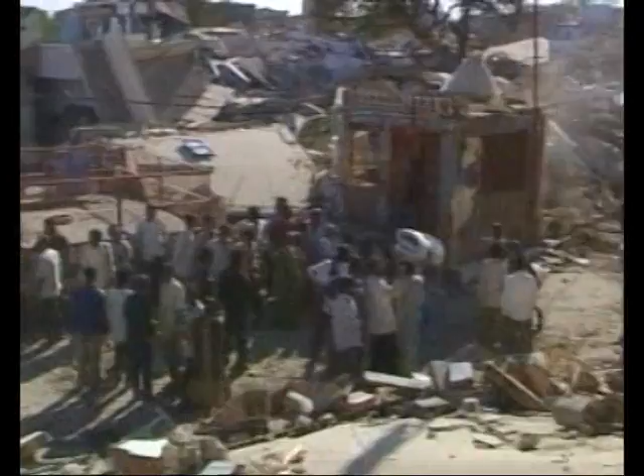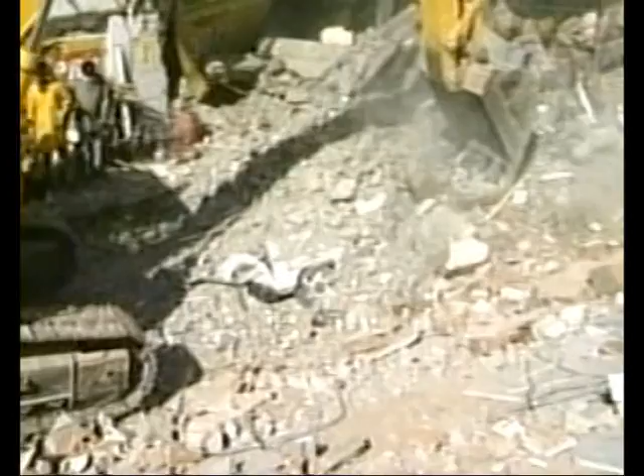This could be you or me, as in the last 5 major earthquakes, over 2 lakh Indians died without even knowing what wrong they did. Thankfully, we survived. And we should stop and think what we can do to protect ourselves and generations to come from the wrath of earthquakes.

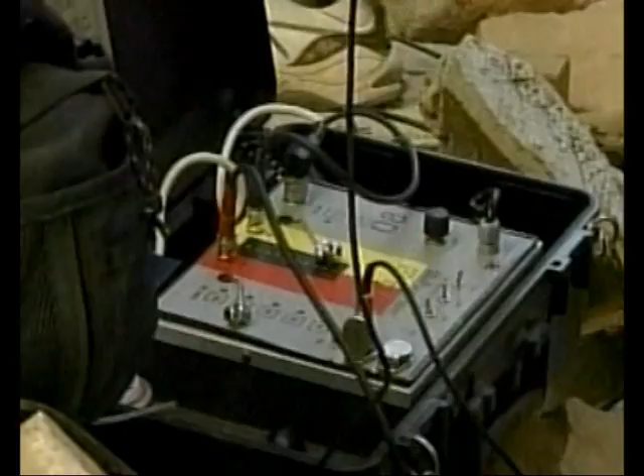We construct houses and other buildings to live, work, and to protect ourselves against the natural calamities. But do we truly bother to ensure a long-lasting and safe building?

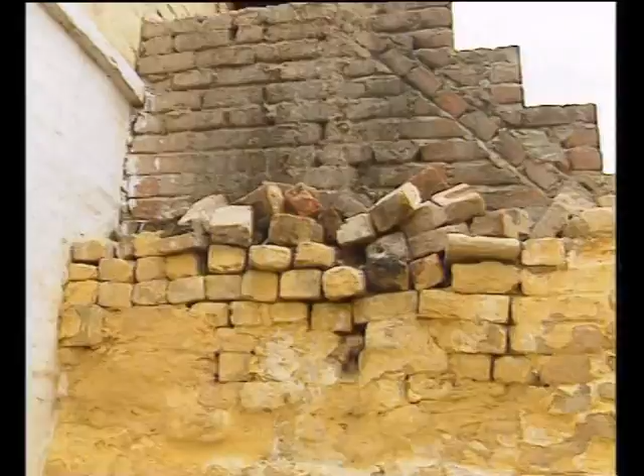Many of those who died could have been with us if they knew how structural engineers and architects use some of the fundamental principles of physics and mathematics to create buildings which can absorb, disperse, and withstand strong seismic forces. Those of us who had incorporated these features in their building structure survived with least to nil damage. As the structural scientists say, earthquakes don't kill, unsafe buildings do.

In India, over 85% of the population lives in masonry buildings. The Disaster Management Division of Ministry of Home Affairs, Government of India, referred a project related to the testing of masonry buildings to the Department of Earthquake Engineering, Indian Institute of Technology, Roorkee.

The idea is to formulate and effectively demonstrate the efficacy of seismic strengthening of the popular 3 types of masonry buildings: brick, block, and stone masonry. The experiments are to be conducted on the railway wagon shock table testing facility available at the department.

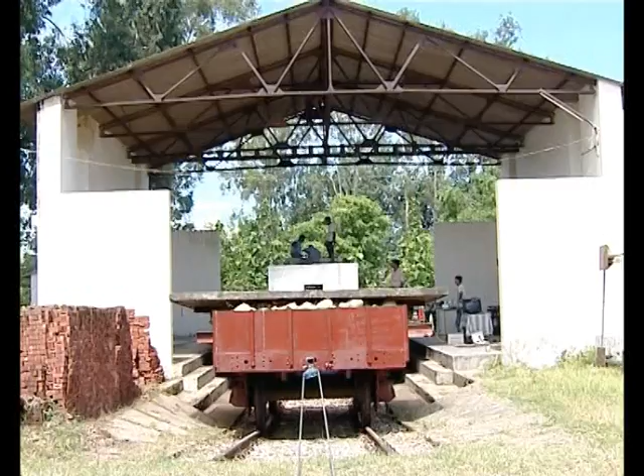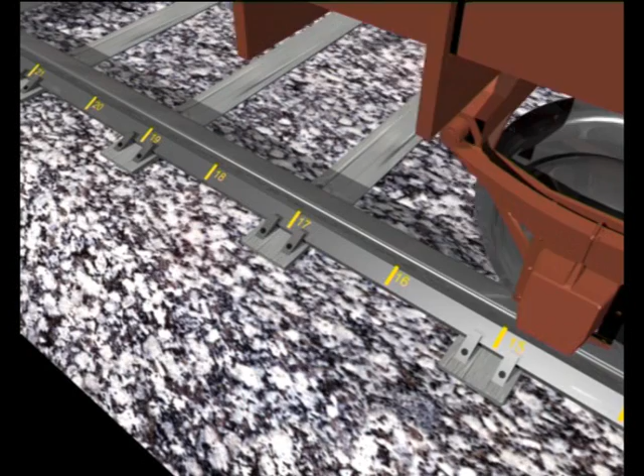The shock table comprises of a 36-meter long railway track having mild gradient on either side. The rails are marked at half-meter intervals as a guide for positioning the wagons before releasing to achieve the desired impact. Shock table forms a rigid steel platform which is used as the base for dynamic testing of building masonry models. 10 helical steel springs have been mounted on both ends of the table to convert the impact into earthquake-like wave.

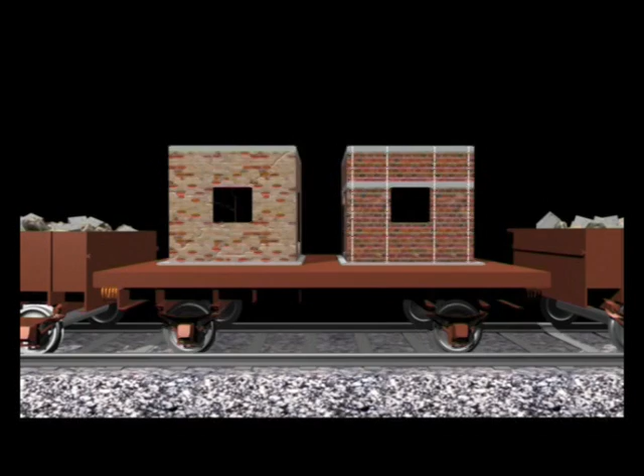Loaded wagons are placed on the track inclines on both sides of the shock table. The weight of each wagon is adjustable. The wagon on the left side is allowed to roll down the incline to collide with the shock table platform. Due to the impact, the shock table wagon starts to move and collide with the other stationary wagon on the right side and receives impact in the reverse direction.

In this way, the model constructed on the shock table receives 2 shocks simulating earthquake-like motion. The intensity of the shock is controlled by positioning the loaded wagon at different distances on the track incline before release for rolling down.

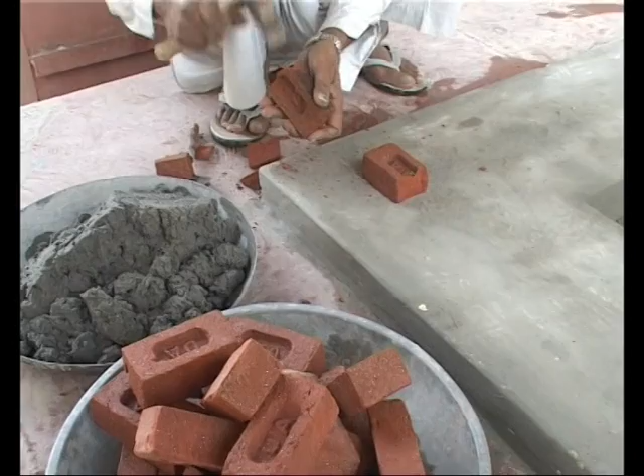2 half-scale, single-room brick masonry models are constructed simultaneously on the shock table. The first model is constructed using popular construction techniques as we have been doing for years. This model has been constructed without any earthquake-resistant features.

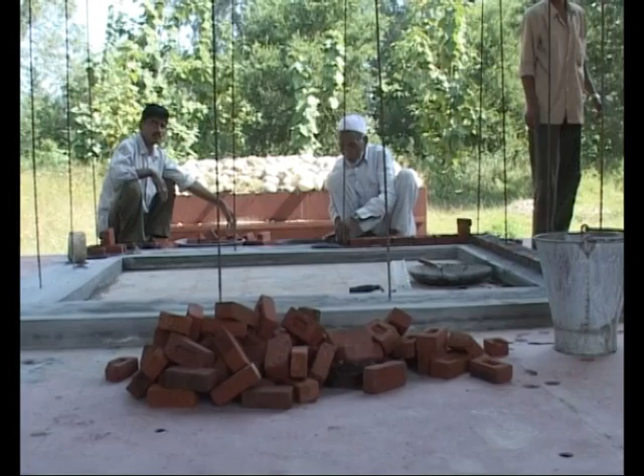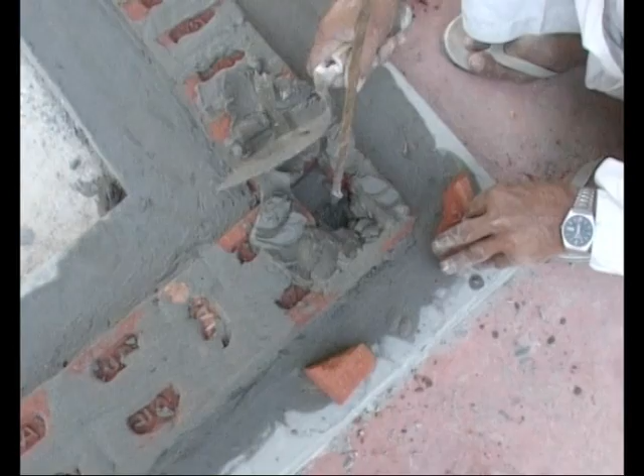In the second model, all seismic strengthening arrangements specified in earthquake safety codes like vertical reinforcing bars at the corners, jamb steel around the openings, and seismic band at lintel level are incorporated. As per chosen scale, half-size bricks are laid in 1:6 cement sand mortar, providing space for the vertical steel bars at the corners and near the openings.

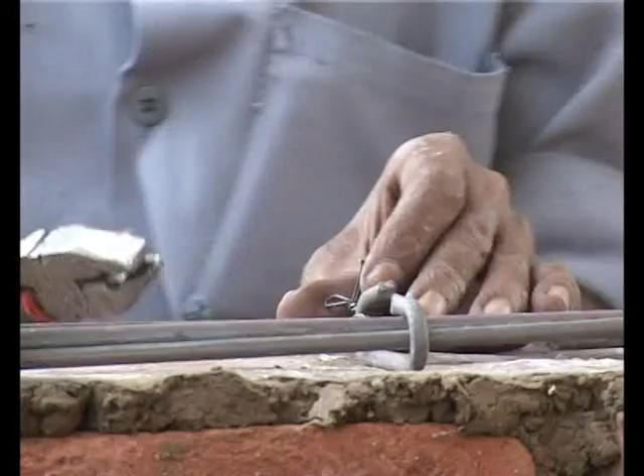The gap around the vertical bars is filled in 1:2:4 concrete mix with 6 mm size aggregates after every 5 courses of the wall construction so as to develop full bonding. The walls are completed up to the lintel level and a monolithic horizontal seismic band is provided on all 4 walls so as to integrate the perpendicular walls.

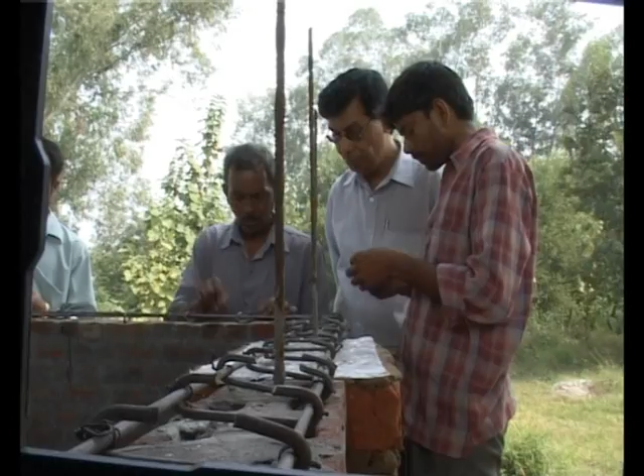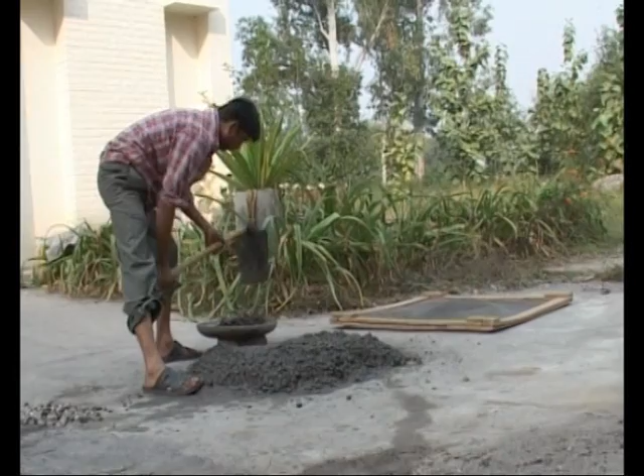In the actual construction, vertical reinforcement is embedded in the plinth masonry into the foundation and is passed through the lintel band and anchored into the roof slab to develop its tensile strength. The reinforced concrete band has the same width as the thickness of wall. The vertical thickness is kept to the half scale. Then the wall is completed up to the roof level and the roof slab is laid as was done for the traditional model.

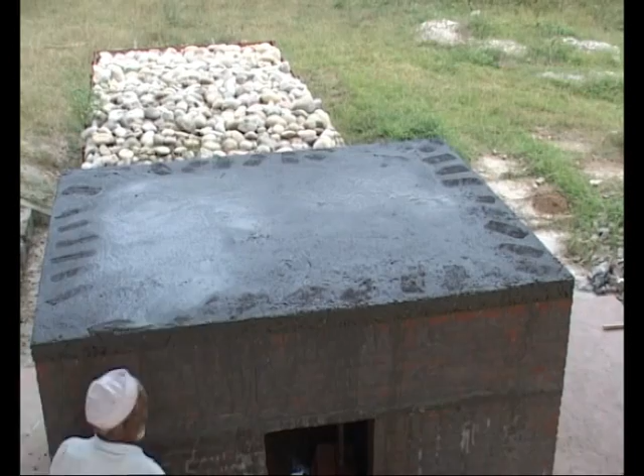The two models look exactly the same. The traditional model is constructed using conventional techniques, while the earthquake-resistant model incorporates corner vertical steel bars, jamb steel bars around the openings, and horizontal seismic band on all the 4 walls at the lintel level. Which will be safe if an earthquake occurs? We shall see by impacting the shock table.

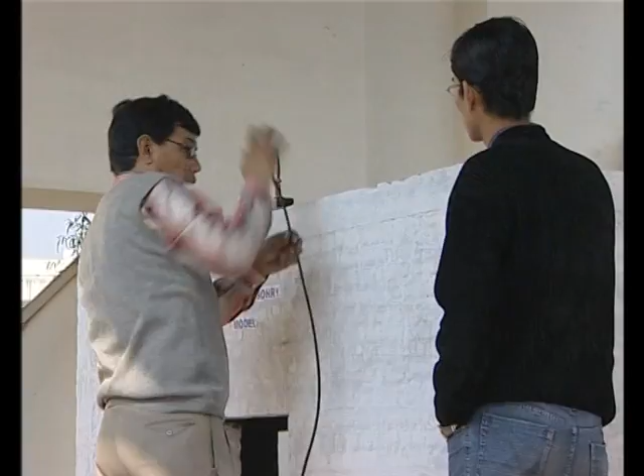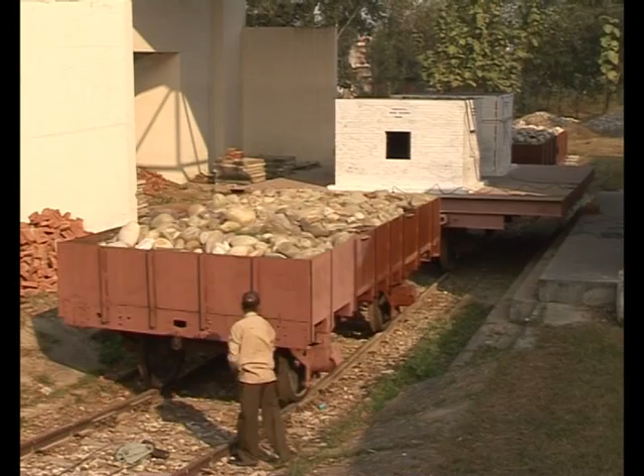Before testing, the table and models are instrumented using accelerometers to measure the intensity of the simulated earthquake and the effect on the models. In the first shock, the loading wagon hits the shock table from the left side, simulating a low intensity shaking. With each subsequent shock, there is a gradual increase in the intensity of the shocks.

So, what do we see? Even after the 4th shock simulating an earthquake of severe intensity, no damage is seen in the masonry model with earthquake-resistant features. But the conventional model is badly damaged.

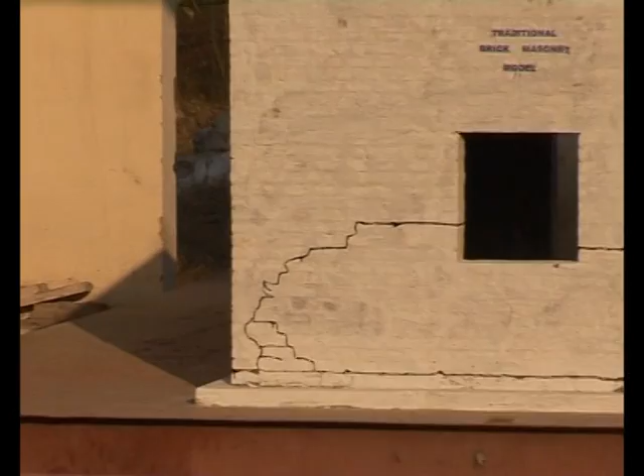The 5th shock is made even stronger. The model with earthquake-resisting elements still remains undamaged.

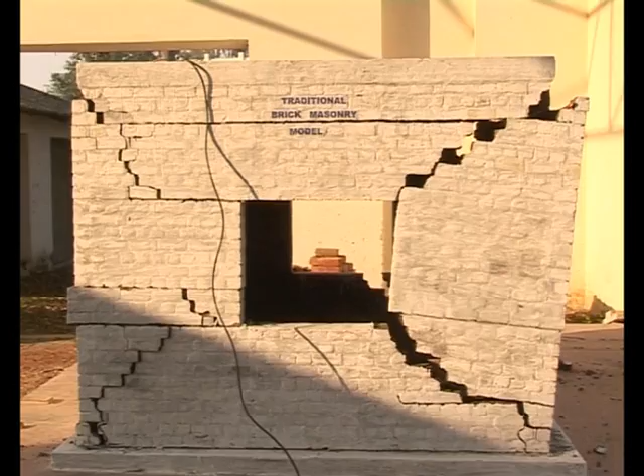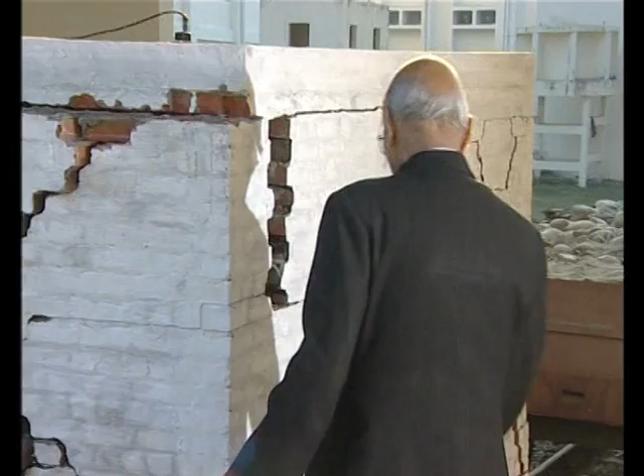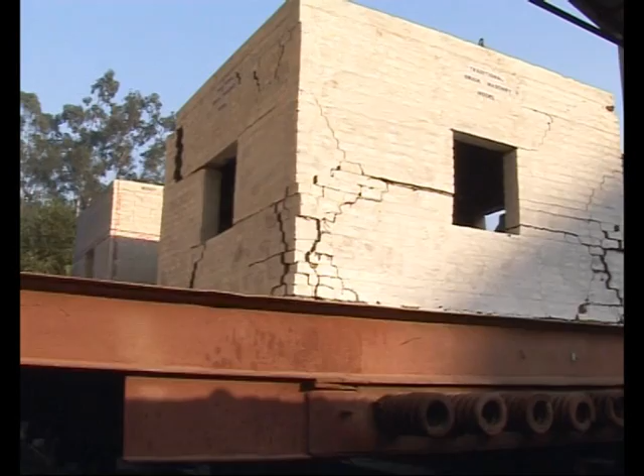So, we see here that this unreinforced model constructed in the traditional manner is failing. On the other hand, this is a model of the same type with the same geometrical details, same dimensions, same wall thickness, same roof thickness. So, everything, mortar etc., everything is the same, but the difference is now it has vertical reinforcing bars at the corners, all the 4 corners.

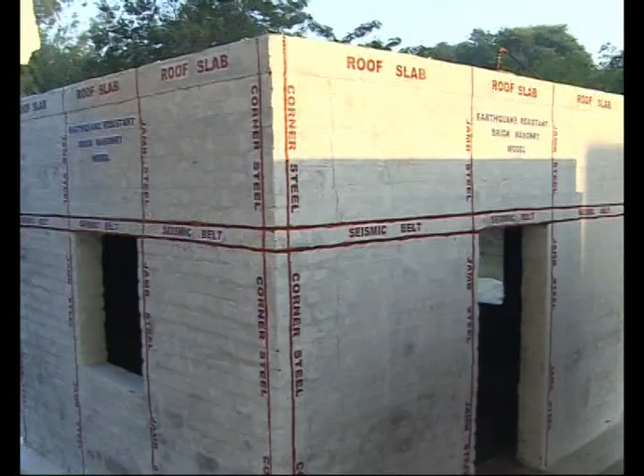It has also vertical bars at the jambs of openings, as we can see here, window jambs and the door jambs, and also it has a seismic belt or band actually, which is going inside all round the building. Now, these reinforcing details are keeping the whole building intact and in very much integrated behavior of all the walls put together. So, you can see the difference.

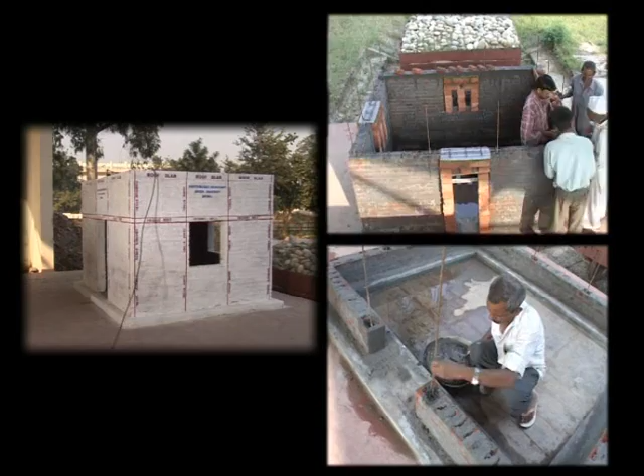Earthquake strengthening of buildings could have saved thousands of lives in Bhuj, Latur and Kashmir earthquakes. At places where it is difficult to get bricks, people use concrete blocks for constructing buildings. Therefore, the second set of tests is conducted using concrete block masonry construction.

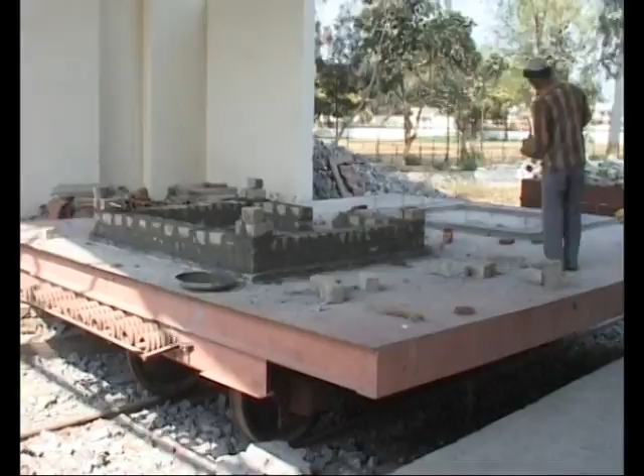Solid concrete blocks of half size have been used to construct two half-scale similar models on the shock table. Both the models are constructed in the same way as the brick models were constructed. For construction of the wall with corner steel and jamb steel near the door and window openings in the earthquake-resistant model, special blocks with semicircular holes are used.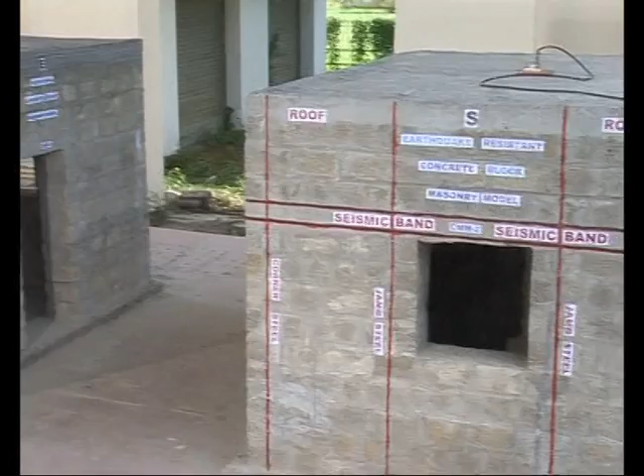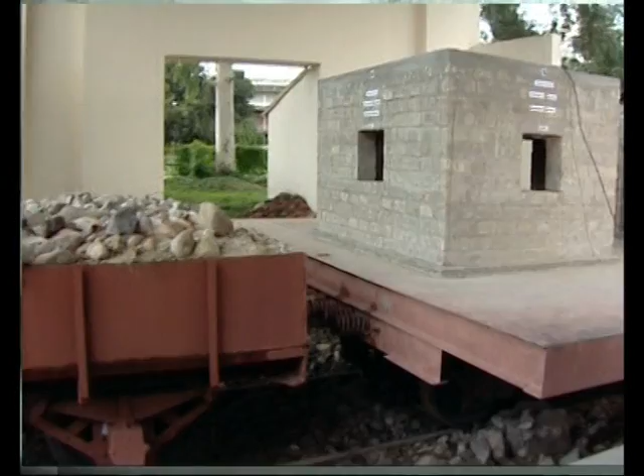The two models differ from each other as the strengthened model additionally has corner vertical steel bars, jamb vertical steel bars around the openings, and horizontal seismic band on all the four walls at the lintel level. During the testing of the models, shock table is imparted shocks of gradually increasing intensity.

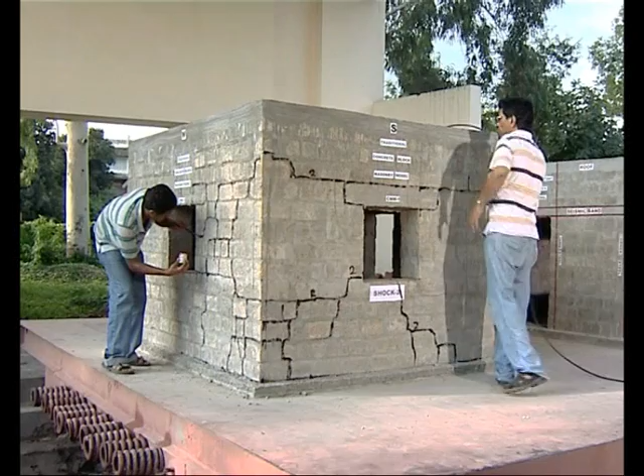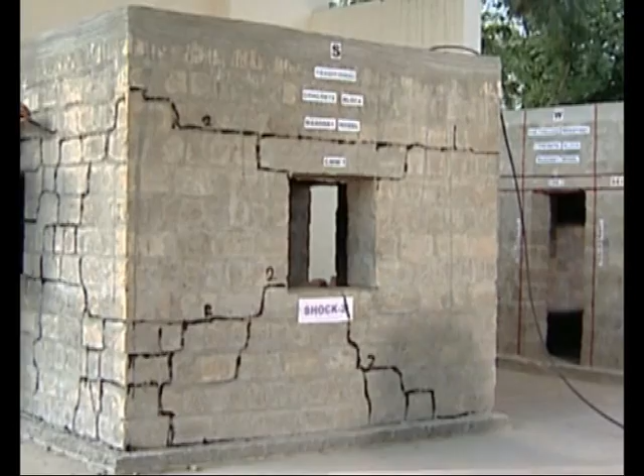In the shock equivalent to a moderate intensity quake, cracks started to form diagonally at the corners of the window openings in the traditional model and gradually spreading towards the corner of the wall. Horizontal cracks are also visible just above the lintel beam, extending to the end of the wall and reaching up to the corners. There is a slipping of the wall from the foundation. These are typical shear cracks observed in masonry buildings after a moderate size earthquake has struck the region. However, the earthquake resistant model remains undamaged even after this shock.

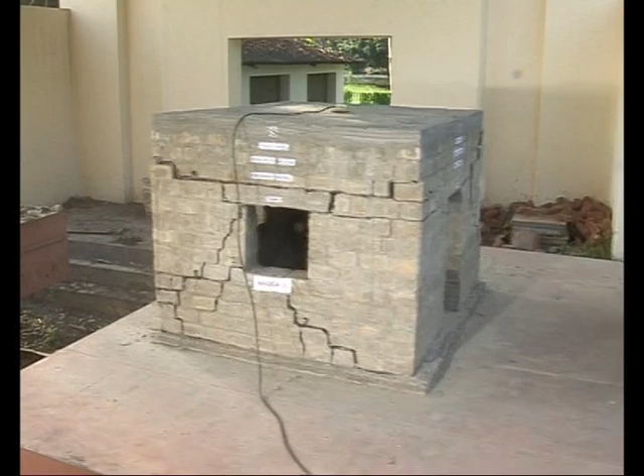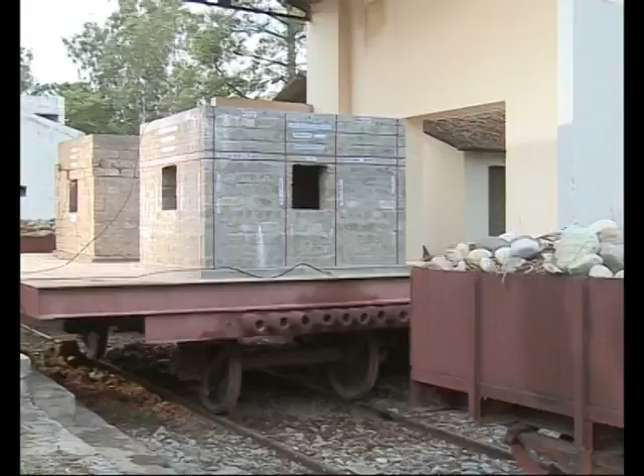For the next shock, the loading wagon is placed further up on the incline to simulate an earthquake of severe intensity, which could occur in higher earthquake zones 4 or 5 in the orange or red areas as per the seismic zoning map of India. The traditional model further loses its strength and stiffness. The next shock is of slightly higher intensity as compared to the previous shock.

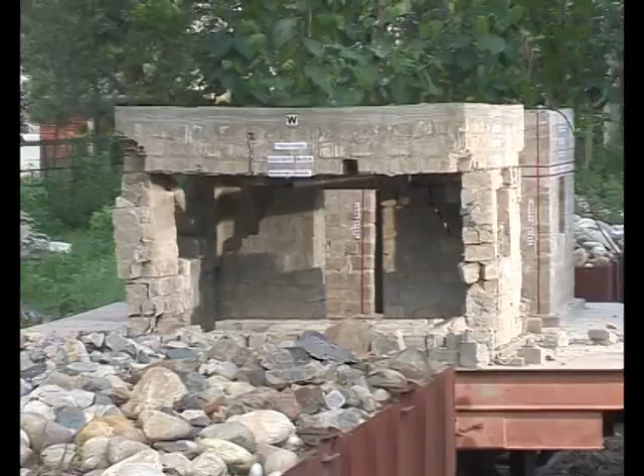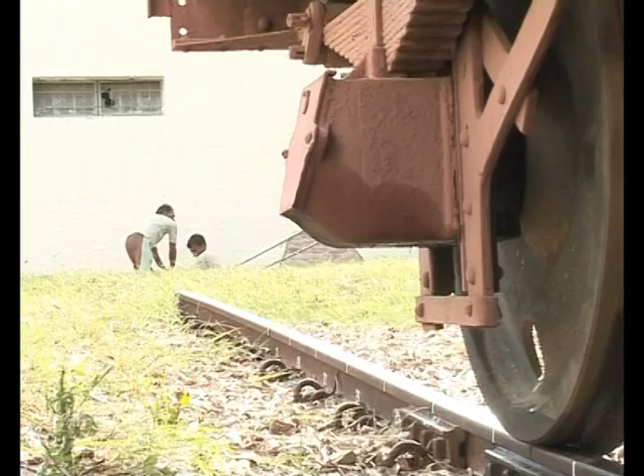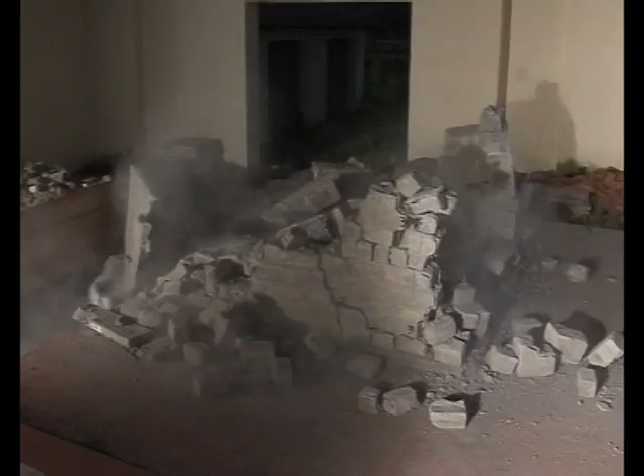Here too, the earthquake-resistant concrete block masonry model shows no sign of distress. There is no damage and the model is intact even after imparting a severe intensity shock to it. In the next and final shock, the intensity of shock loading is further increased so as to check on the strength of the earthquake-resistant model under a much more intense shock. The performance of the earthquake-resistant concrete block masonry model is indeed being put to the ultimate test under this shock loading.

Traditional model could not withstand the severe intensity shock. However, there are no cracks in the earthquake-resistant model. The earthquake-resistant features have improved the building under earthquake shaking.

India is a collage with myriad cultural and religious colors. The diversity in India is even spread across its geographical terrain. As a result, at different places, people construct buildings using different materials available locally. Like in the hilly areas, one would see that a majority of buildings are made using stone masonry construction.

The loss of lives in earthquakes of Uttarkashi, Chamoli and Bhuj underscored the necessity of earthquake strengthening of the stone masonry buildings. Half-scale single-room models are constructed on the shock table. As before, the first model is constructed using traditional construction techniques used by common man.

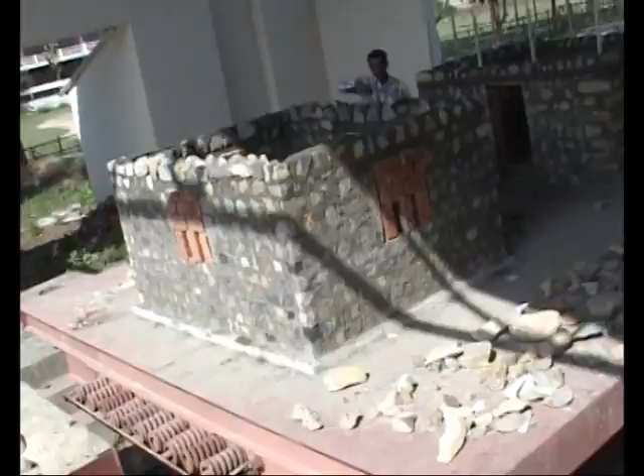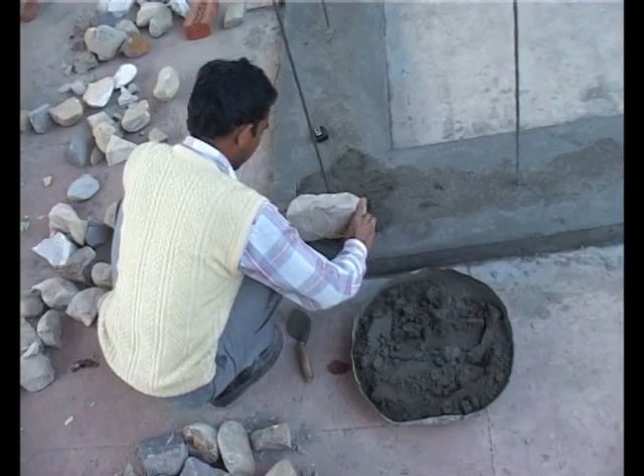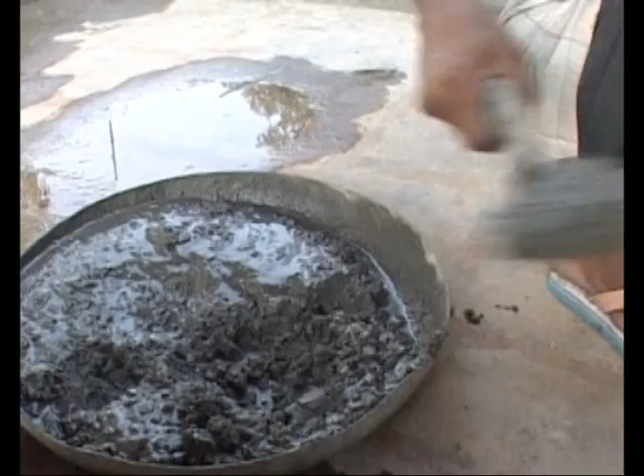While constructing the earthquake-resistant model, features like the corner steel and the jamb steel around the openings are placed so as to develop tensile strength. For providing vertical bars in the stone masonry, casing pipes with a diameter of 50 millimeters are placed around the steel bars and the masonry is then built. After construction of 3 courses of masonry, the casing pipes are raised and the cavities are filled with concrete mix and compacted.

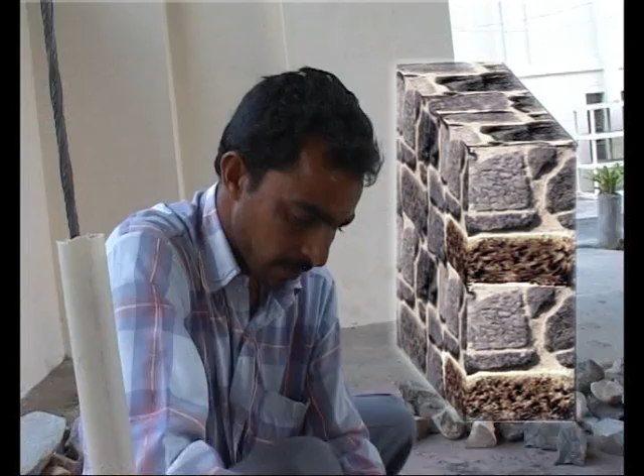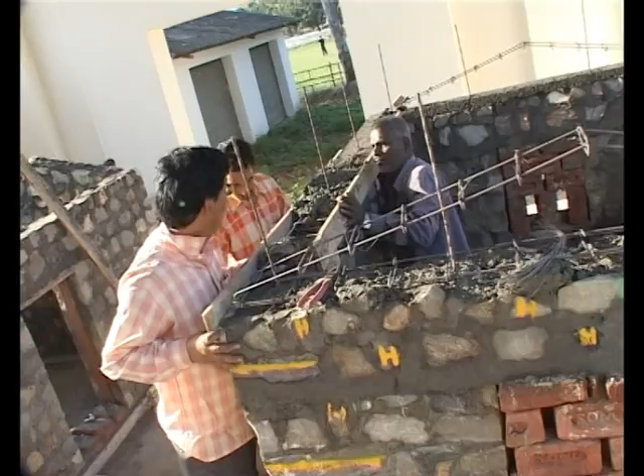In the construction of walls, through stone or header is placed at regular intervals. In each layer at the corner, a long stone is put into the alternate layers of walls, strengthening the building structure. A horizontal seismic band is provided on all 4 walls at the lintel level. In the stone buildings, another horizontal seismic band of the same dimension as of the lintel band is provided on all 4 walls at the eaves level, and gable band is extended up from this band.

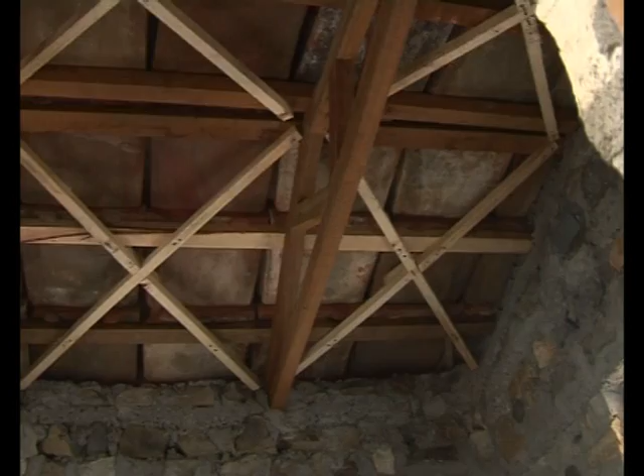In the earthquake-resistant masonry model, wooden trusses and cross bracings are used instead of the usual rafter system in the roof. In order to prevent sliding of the roof tiles, they are bound with wire mesh at the ridge and the edges, and concreting is done on this mesh.

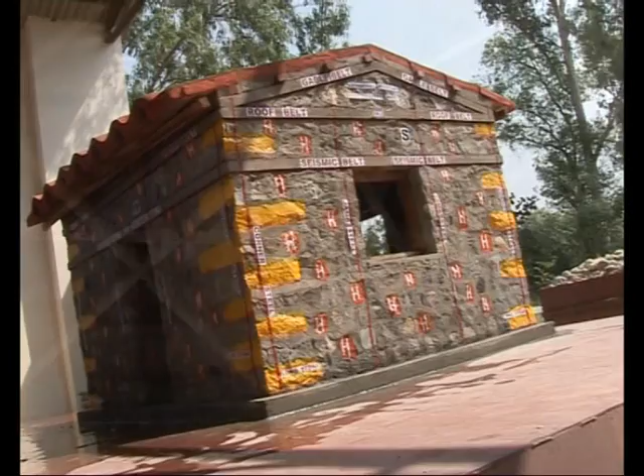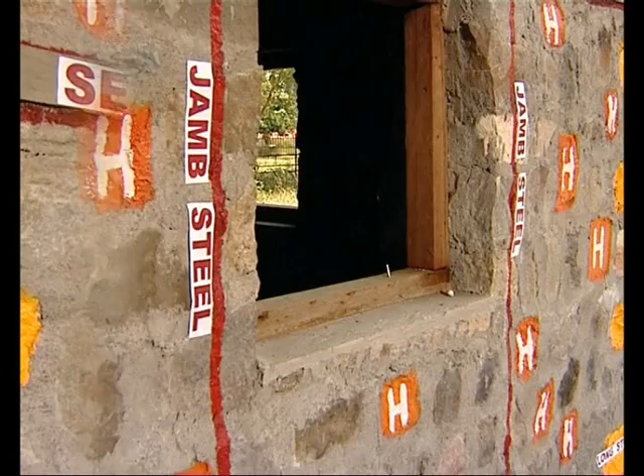The 2 masonry models differ as the strengthened model has wooden trusses and cross bracings, header or through stones, cornerstones, corner vertical steel bars, jamb vertical steel bars around the openings, horizontal seismic band on all the 4 walls at the lintel level, horizontal roof band on all the 4 walls at the eaves level, and gable band at the 2 ends reaching up to the tiles or gable walls.

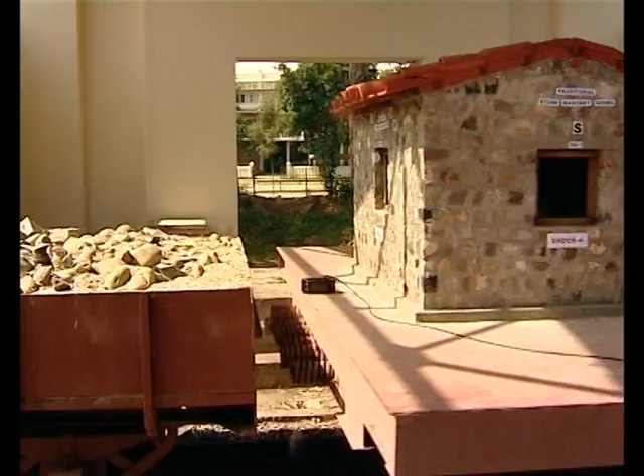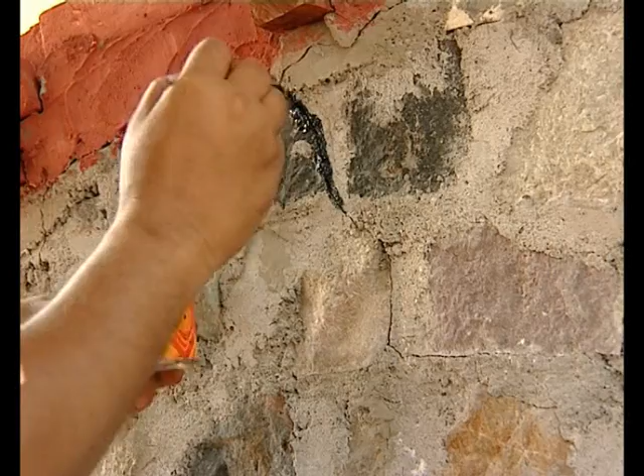The models are subjected to shock loading, each with increasing intensity. This shock is similar to an earthquake of a severe intensity, likely to occur in Zone 4 areas in the seismic zoning map of India. This resulted in cracks opening up in the traditional model, whereas the model with earthquake-resistant features showed no distress, a visible proof of the strengthening of the building structure.

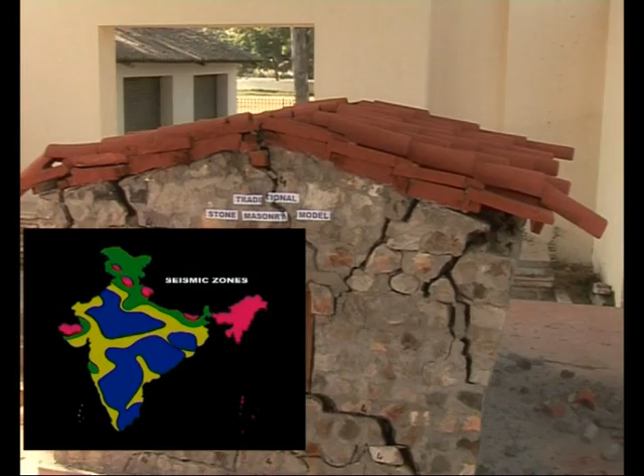For the final shock, we take the loading wagon further up on the incline and release. The resulting shock simulates a very severe earthquake likely to occur in Zone 5 on the Indian seismic zoning map and affecting cities like Bhuj and Chamoli.

First, the corner has opened out, and then the diagonal cracks had appeared, and this is the beginning of the collapse of the building. If we provide the seismic belt like this throughout the building, which holds all the walls together, then the cracks will not develop, it will not trigger the collapse of the building, and it will be safe.

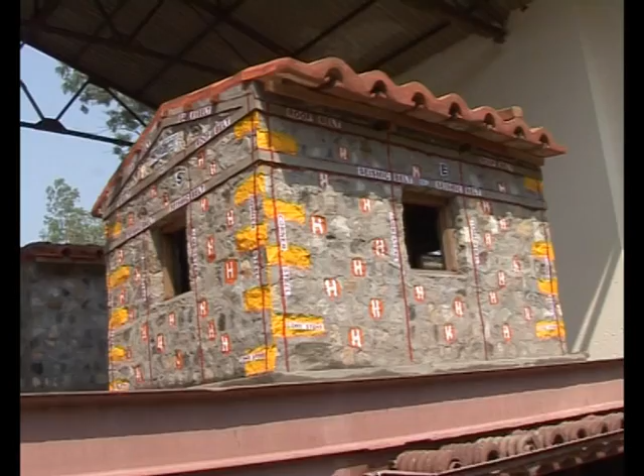Yes, indeed. But how much extra does it cost to build an earthquake-resistant house? Well, it will cost just an additional 5 to 6% of the cost of a traditional building and ensure complete safety for the family.

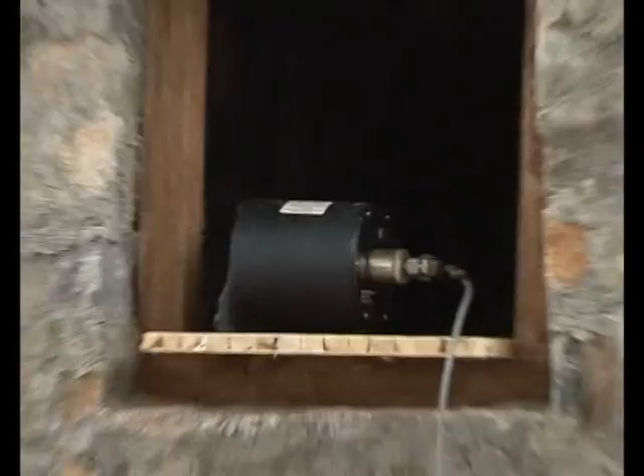A safe dwelling unit is equally necessary and important for those of us who have already constructed a house and cannot afford to rebuild due to financial and other limitations. Hence, there is a need for external strengthening of the already existing buildings. This is known as retrofitting of the existing structures. Traditional model is prepared for incorporating earthquake-resistant features post-construction.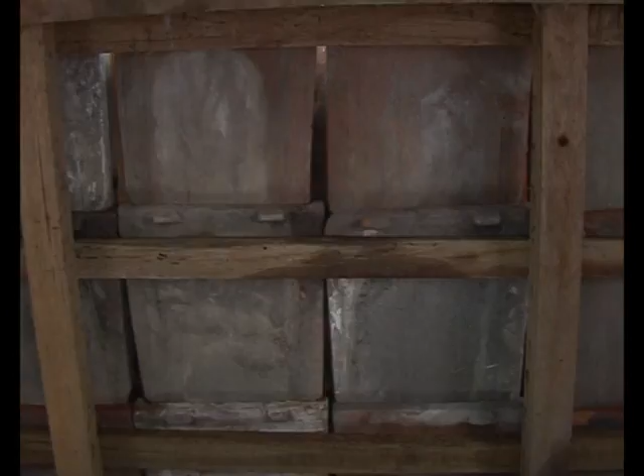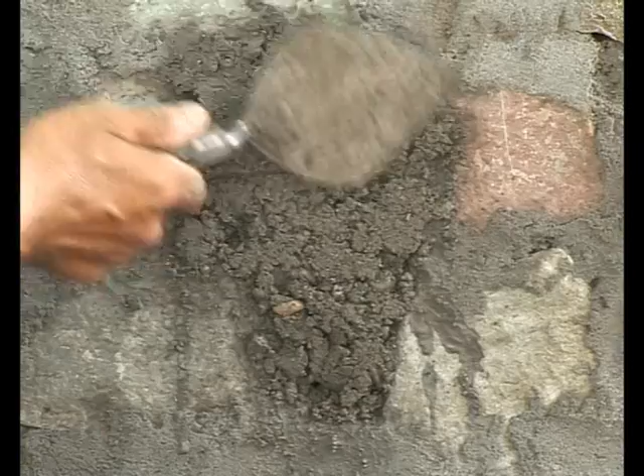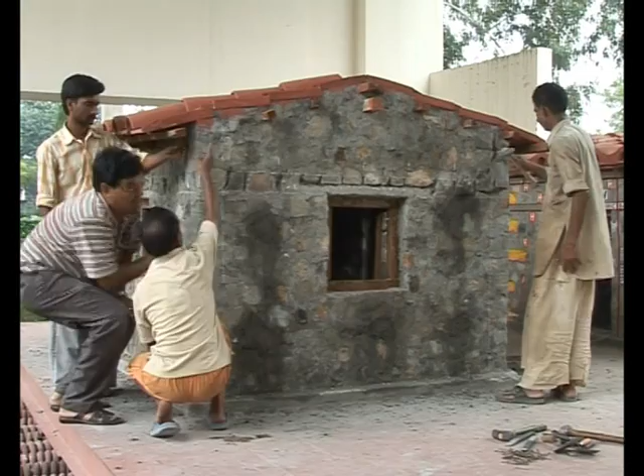For putting the header or through stone, few stones at regular intervals are taken out from the walls. These holes are then filled with an S-shaped iron rod and an M15 grade concrete mix. For corner steel, wire mesh is nailed and plastered. Similarly, other earthquake-resistant features like jamb steel, lintel band, roof band and gable band are incorporated externally.

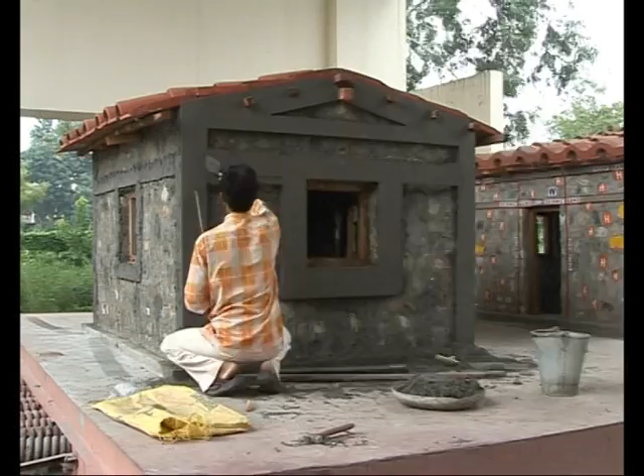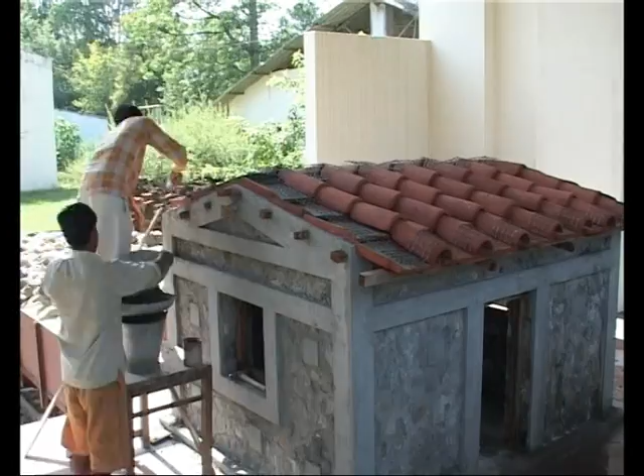For preventing sliding of roof tiles, they are secured by wire mesh and concrete, as was done while constructing the earthquake-resistant model. Now, on the shock table, we have two similar models. These two have the necessary strengthening features retrofitted in one while built-in in the other.

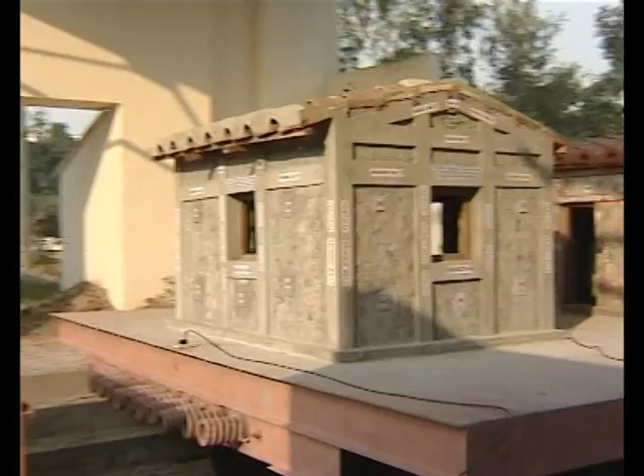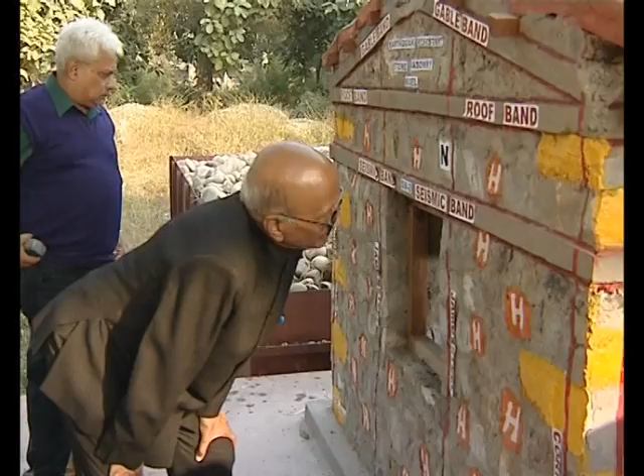For the first shock, the loading wagon is released to generate a low-intensity earthquake. With each subsequent shock, there is a gradual increase in the intensity of the shock loading. It is clearly visible that both the models are showing the desired results. Even after a severe intensity of simulated earthquake loading, there is absolutely no damage in either of the models.

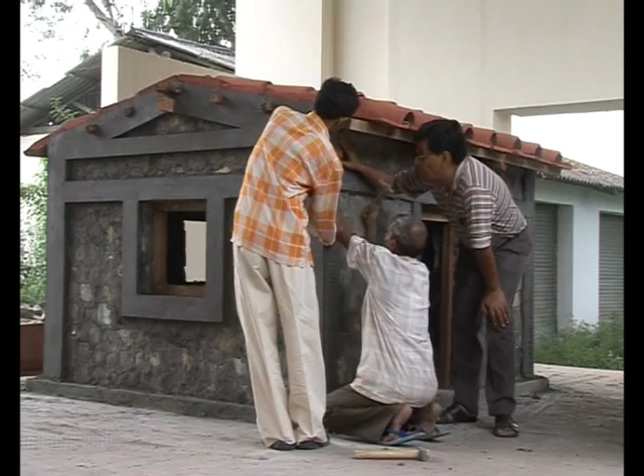Constructing a new building with seismic resistance increases the cost by 5 to 6%, while retrofitting an old house will cost 10 to 12% of the reconstruction expense. But incorporating earthquake strengthening features makes a huge difference, the difference between life and death.

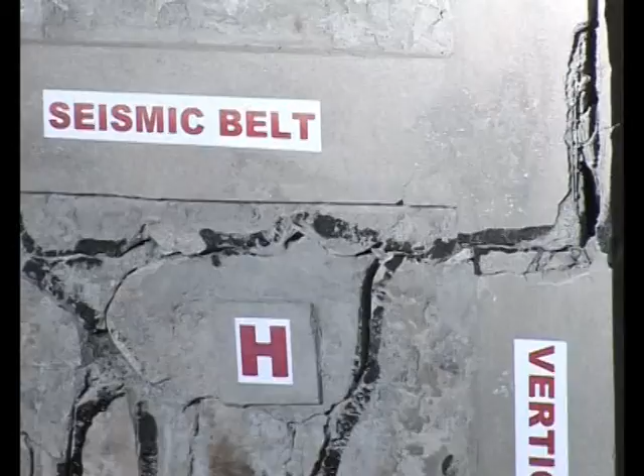These tests prove beyond doubt that earthquakes don't kill, and the structures with safe design and construction will neither collapse under the impact of an earthquake nor kill the inhabitants. Buildings constructed with proper care and incorporating earthquake-resistant features have successfully withstood the wrath of earthquake even at places like Bhuj.

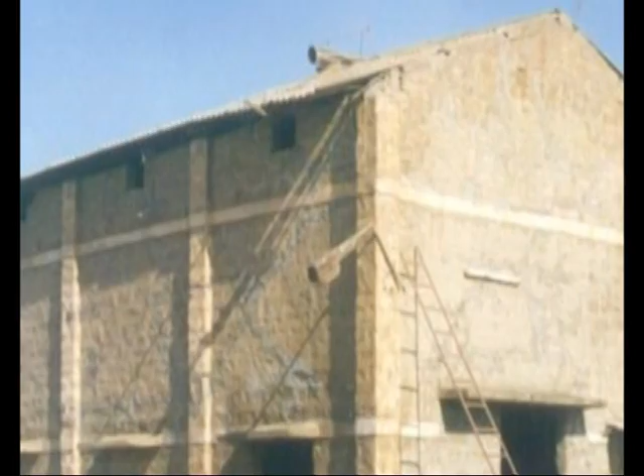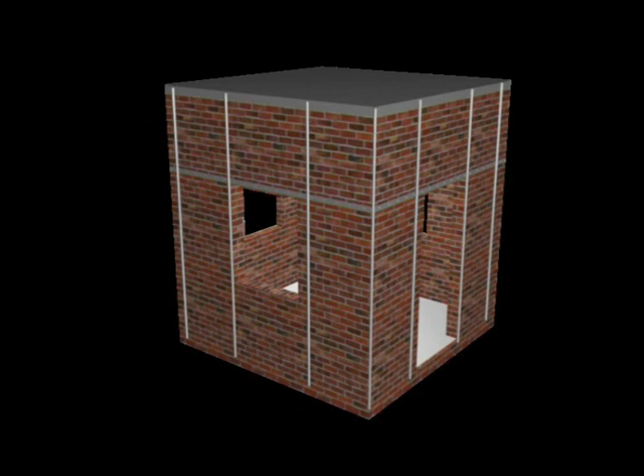You can safeguard generations to come by building structures which have earthquake-resistant features like the vertical jamb steel around the door as well as the window openings, vertical steel at all the corners, horizontal seismic band on all the four walls at the lintel level, and in the stone masonry structure, additional roof and gable bands. These features, at a very little additional cost, would make the difference between life and death, not only for you, but also for your loved ones. Remember always, earthquakes don't kill.